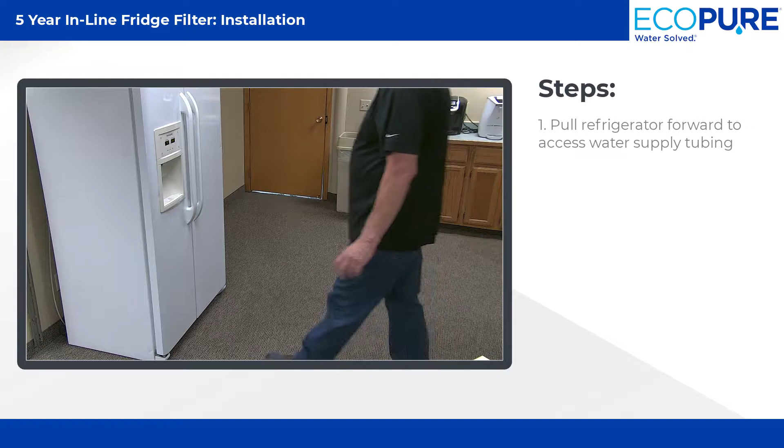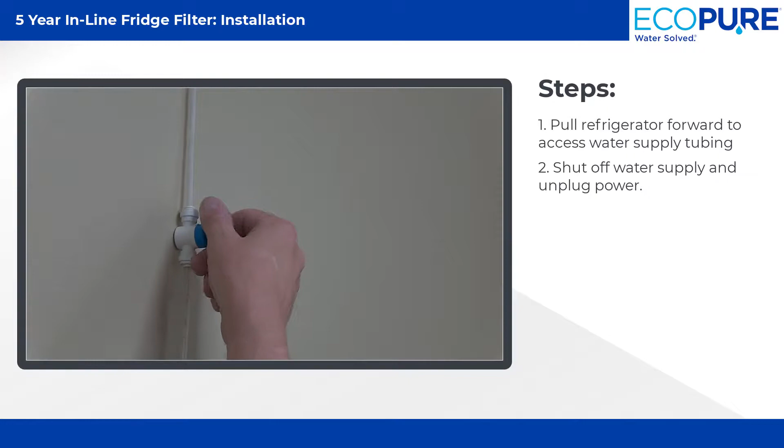Once you have the necessary tools, the first step is to pull the refrigerator forward to access the water supply tubing. If needed, have another person help you with this step. Next, shut off the water supply to the refrigerator and unplug the power supply from the outlet.

This is a good time to measure your water supply tubing. Our inline refrigerator filter will fit 1/4-inch tubing. If the tubing you have is another size, you will need an adapter to complete the installation. You can purchase these adapters at your local plumbing supply store.

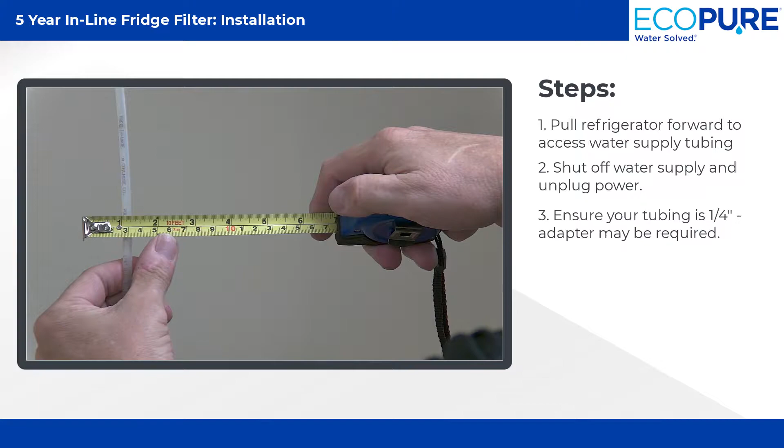This next step is for plastic water supply lines. If you have a braided supply line, I'll teach you what to do shortly. Now we're going to cleanly cut the water supply tube where you want to install the filter. It's important that the water supply tube is cut as square as possible, so the ends are flush.

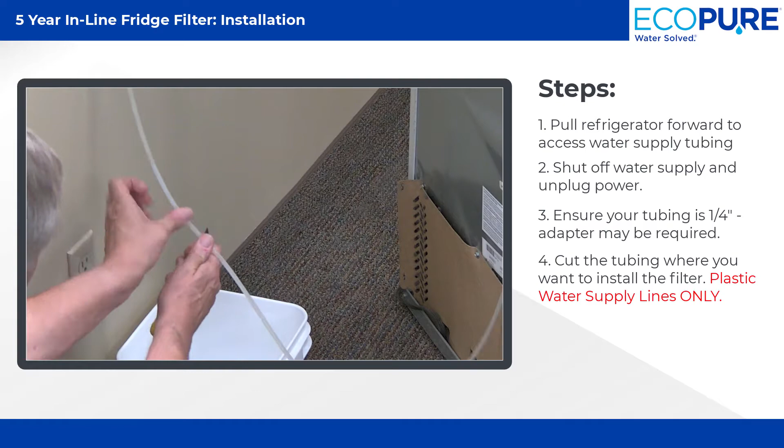I recommend having a bucket ready to catch any excess water that may be in the water supply lines. Be sure to leave yourself enough tubing length to move the fridge in and out to access the filter in the future.

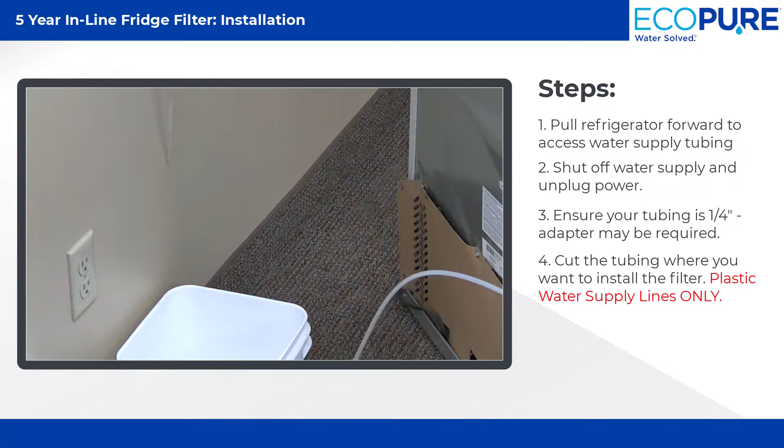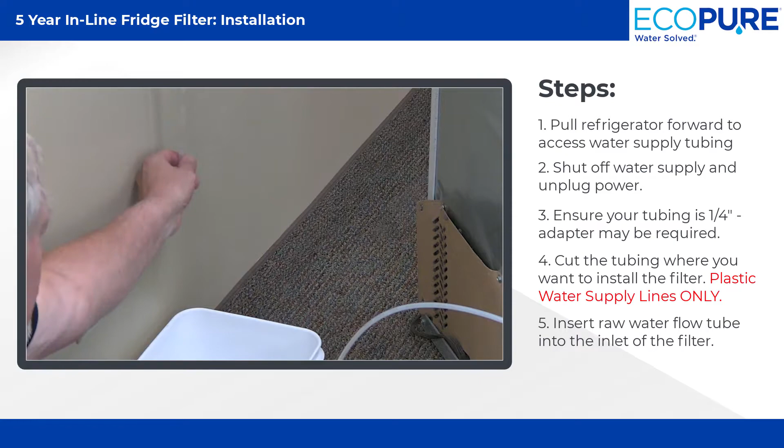Next, you will need to ensure that the raw water flow is going into the inlet of the filter. Insert the raw water supply tube into the inlet collet. Ensure it's completely inserted, which is about 11/16 of an inch.

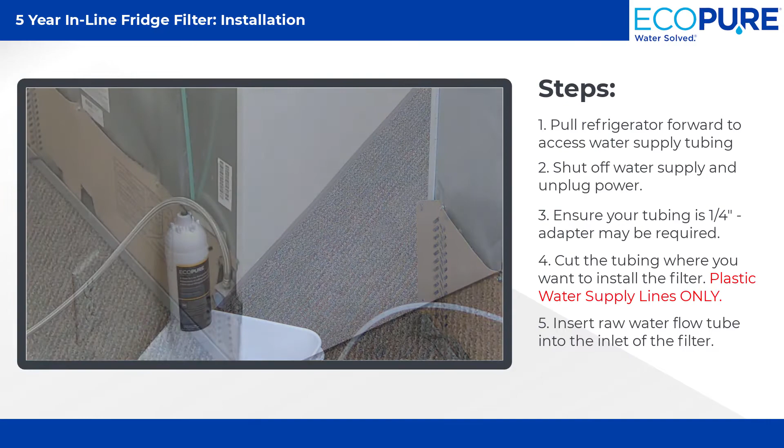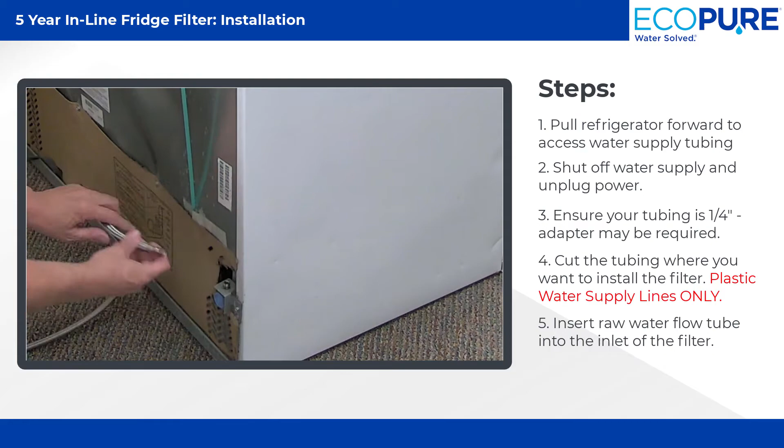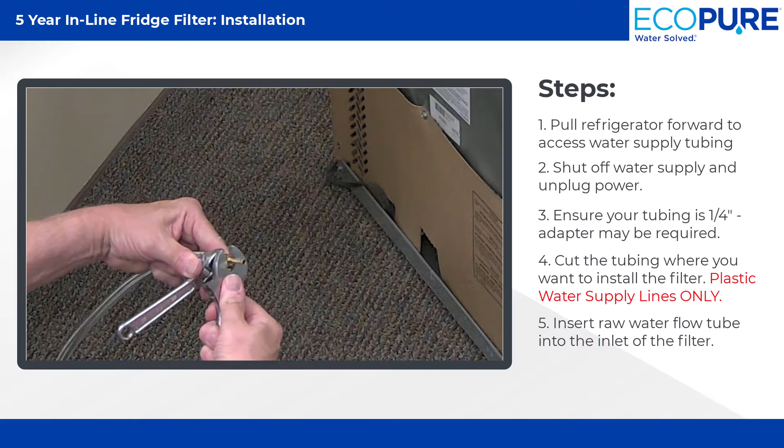If you have a braided water supply line, you will need to unscrew the line from the back of the refrigerator. Using 2 adjustable wrenches, attach the adapter that came with the filter to the water supply line like shown here. Then, insert the adapter into the inlet of the filter.

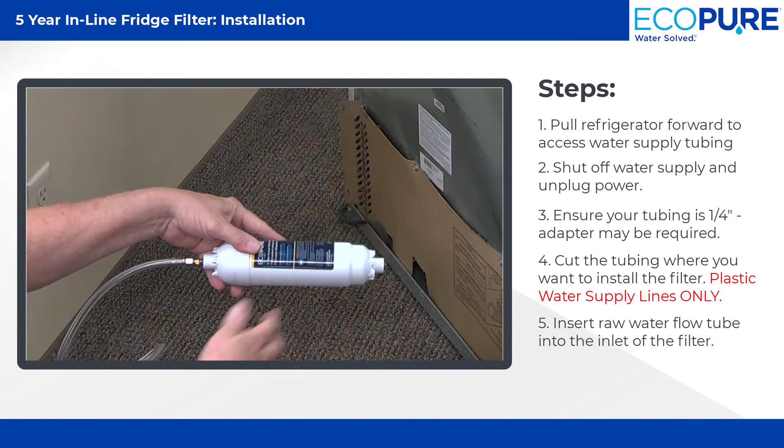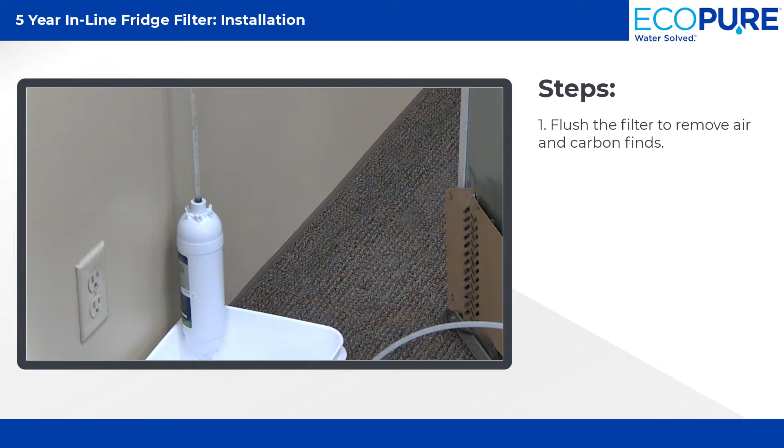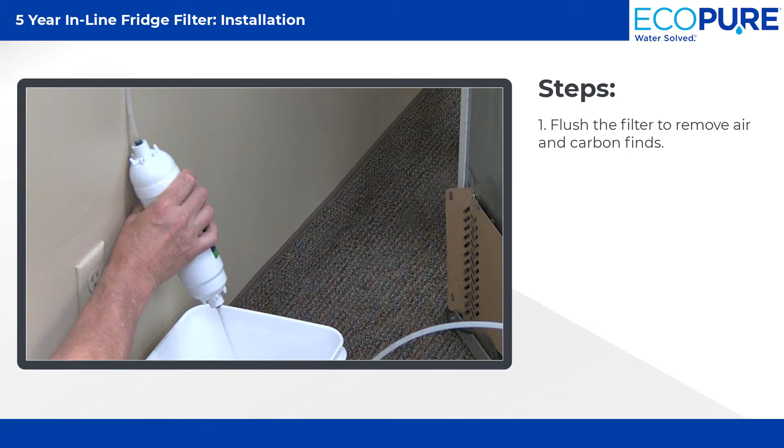Now we're going to flush the filter and remove any air and carbon fines from it. This is so that the water won't run black from the fridge for the first few gallons. To do this, turn the water supply on and drain about 5 gallons of water into a bucket. Then, turn your water supply back off.

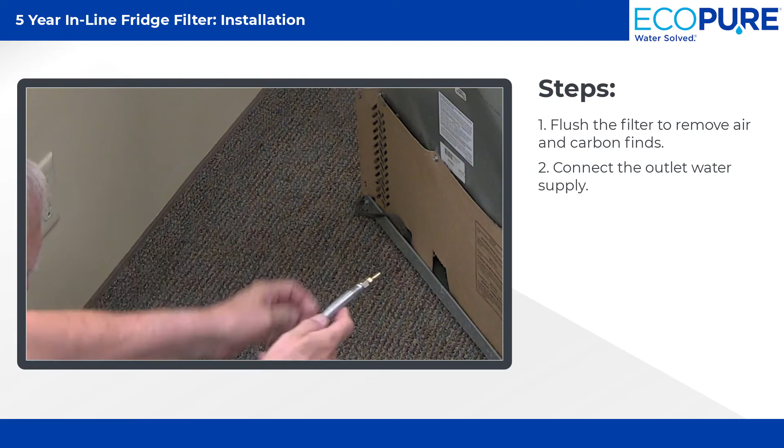With the filter flushed, it's time to connect the outlet water supply tube by inserting it into the outlet port of the filter. Just like before, if you have a braided water supply line, attach the adapter that came with the filter onto the supply line like shown here. Insert the adapter into the outlet of the filter. Then, thread the braided supply line into the back of the refrigerator.

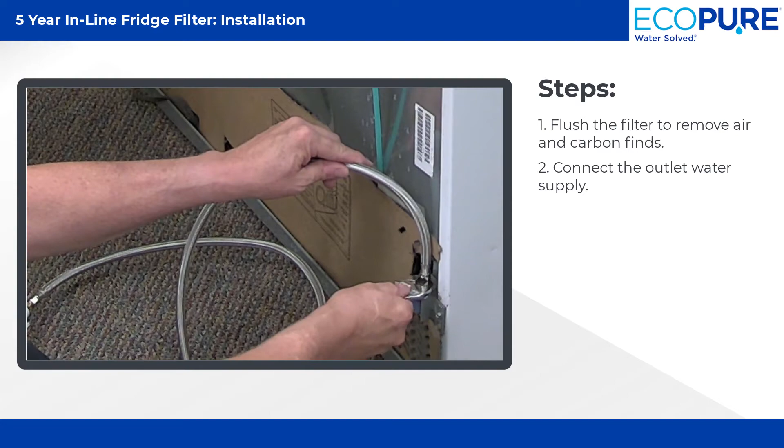Now it's time to check for leaks. Open the water supply valve and inspect the inlet and outlet ports. If no leaks are found, then it's time to mount the filter. We're going to need to find a location to mount the filter and attach the filter bracket to the wall. I recommend installing it behind the refrigerator or somewhere where it will be protected.

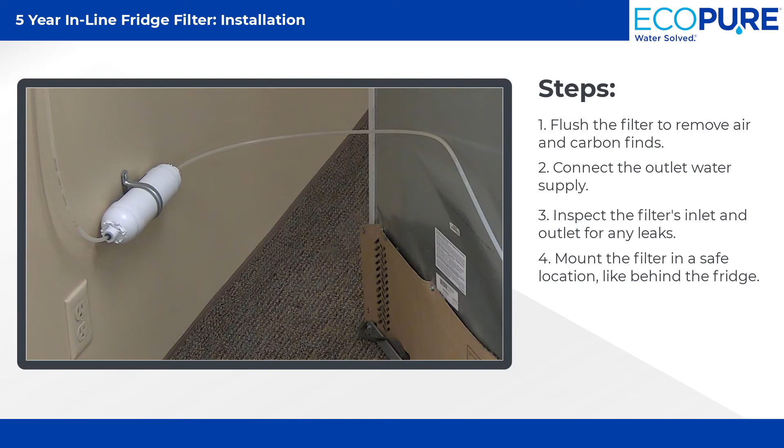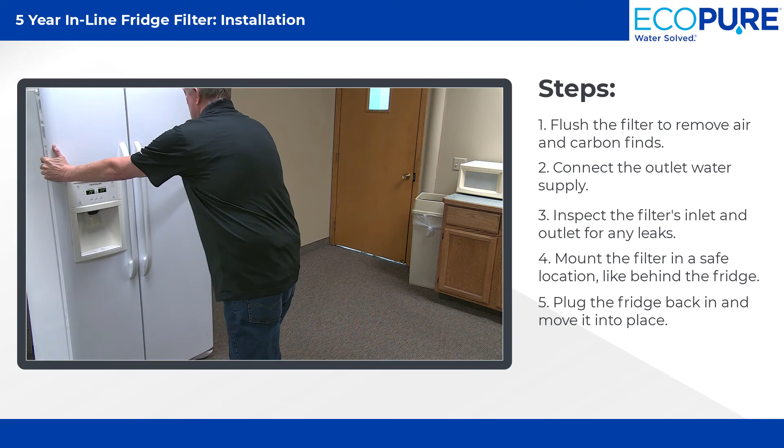With the filter mounted, it's time to plug the refrigerator power cable back into the outlet and move it back in place. As a reminder, our water filters need to be changed at least every 5 years. However, the lifespan may change due to the sediment and makeup of your water source. If you have noticed that your water pressure through the filter has reduced, this is an indication that it may be time to change the filter.